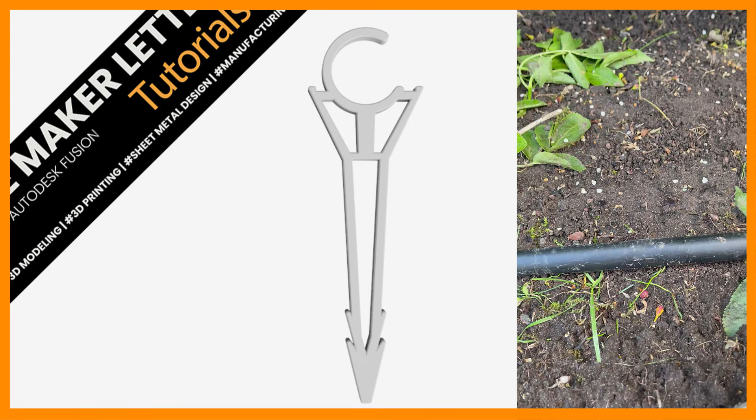You don't need weeks of product development to create something useful. This garden stake went from idea to printable product in under an hour. Let me show you 10 tips that made the process faster.

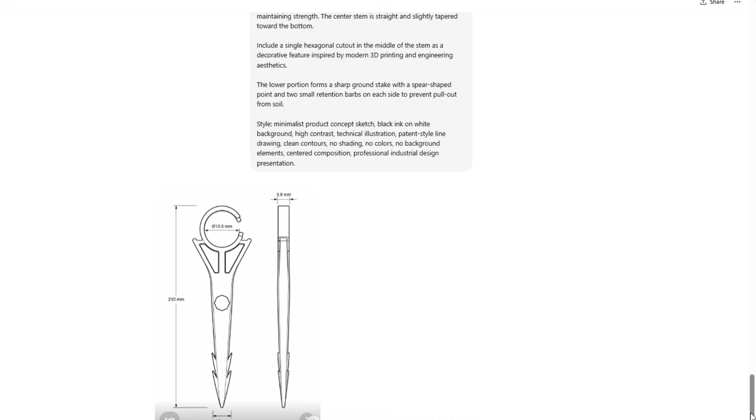Tip number 1 is to use AI for concept generation. I often start by describing the product and asking for a concept sketch. It is a quick way to explore ideas and identify features worth keeping before opening Fusion.

Tip number 2 is to insert the sketch as a canvas in Fusion and calibrate it to the size you need. While it is possible to convert images into SVG files, that workflow often requires a lot of cleanup. For simple products like this, I find it faster to sketch directly on top of the image and use it as a reference.

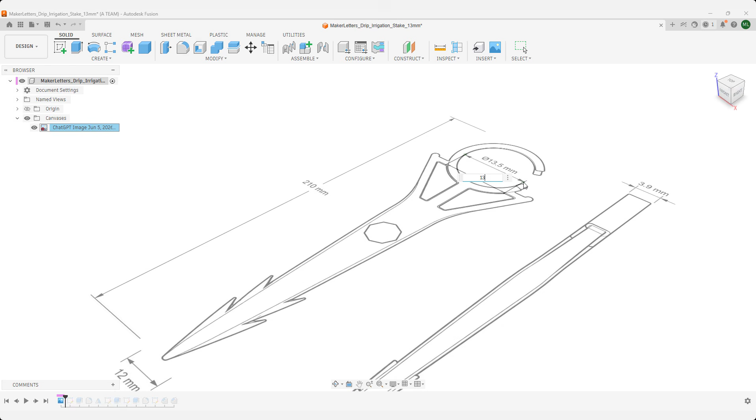Tip number 3 is to keep the sketch as simple as possible. For a symmetric product like this, I only sketch half the profile using the line tool. Then I add the softer shapes later in the solid modeling environment.

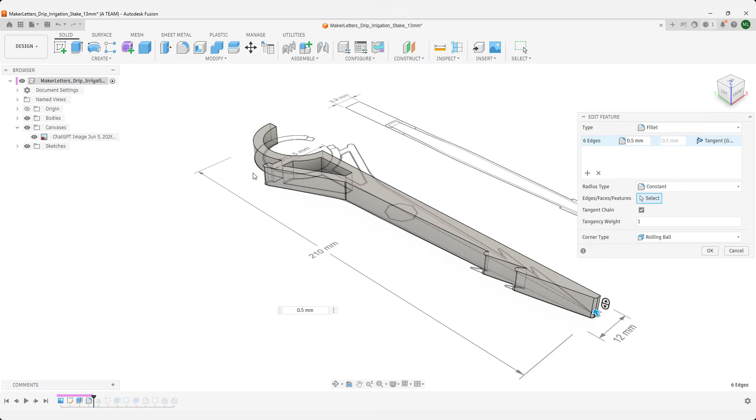Tip number 4 is to use fillets to soften the design. Fillets improve the appearance of the product, can increase strength, and often create a better user experience by removing sharp edges.

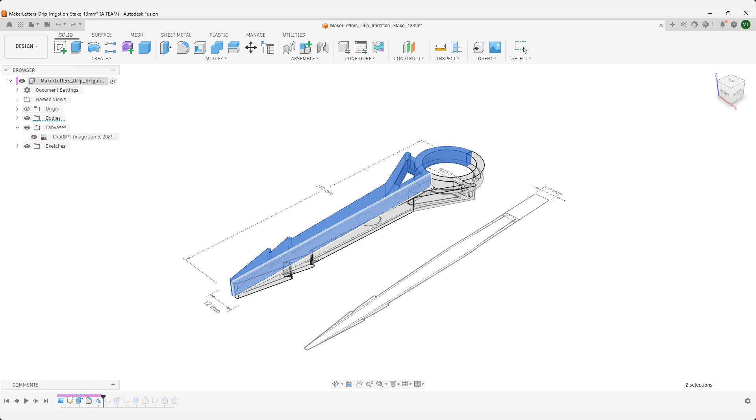Tip number 5 is to mirror the design in the solid modeling environment. Since it can be difficult to position the original sketch perfectly on the canvas, I use one of the inner faces as a mirror plane.

Tip number 6 is to use project and offset to create a cutout sketch from the existing geometry. It is a quick way to remove material, reduce print time, and lower filament usage without having to redraw the design from scratch.

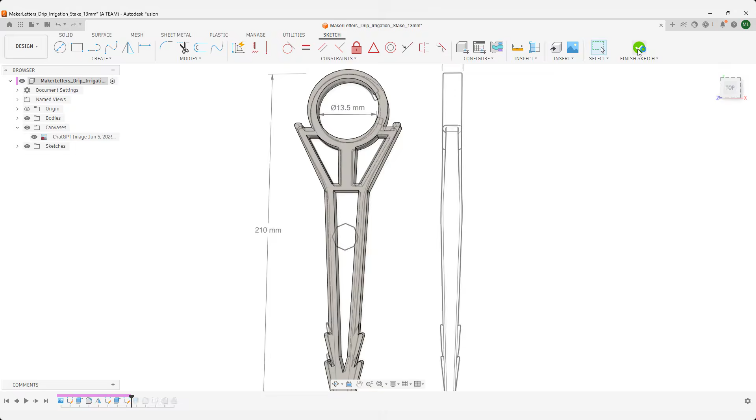Tip number 7 is to take advantage of the flexibility of 3D printed parts. For the hose clip, I made the opening slightly smaller than the hose diameter. The material flexes just enough for the hose to snap into place and stay securely attached.

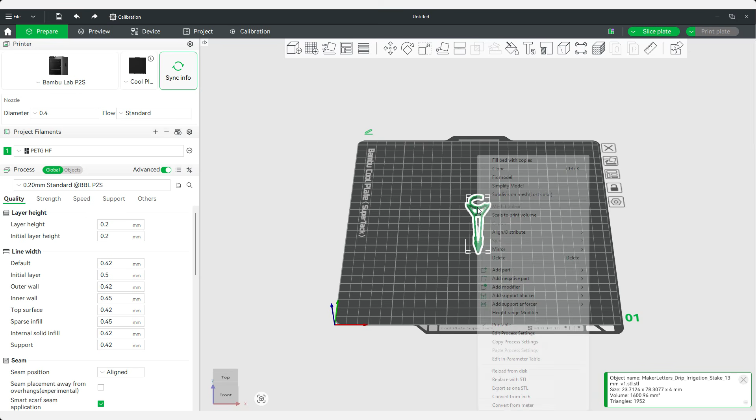Tip number 8 is to add chamfers to the edges. They give the product a cleaner appearance and help create a more refined final print. Tip number 9 is to design with your print bed in mind. Small adjustments to the size can make it possible to print more parts in a single batch, saving both time and effort.

Tip number 10 is to add a small brim around the parts. A brim helps keep the prints firmly attached to the build plate and reduces the risk of failures, especially when printing multiple small objects at once.